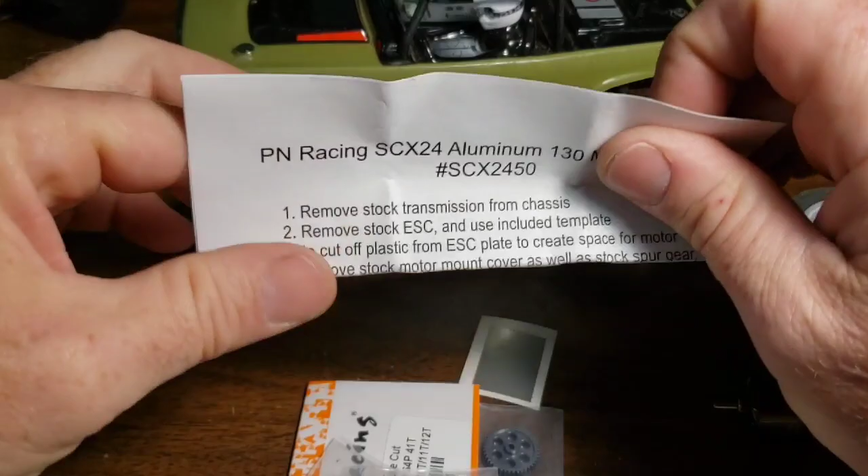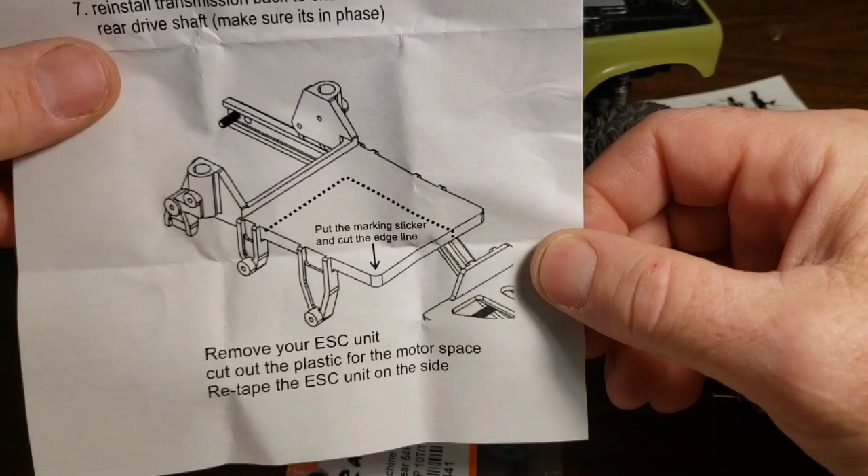It even comes with how-to instructions, how about that? And it tells you to remove quite a bit here. So I am going to have to go with the stock ESC mount, and I guess the Hot Racing one's going to go back into storage for a while.

I'll start by showing you the stock photo of how it's supposed to mount, and then we'll proceed forward from there.

I was looking ahead in the instructions a little bit and noticed a few things. First of all, I'm going to have to reflip my skid plate around, because in order to use this Thingiverse or Shapeways motor mount part, you have to flip the motor plate or skid plate around. So I'm going to have to reflip that back to the stock position, because the transmission needs to be on the back side again.

There's no instructions for flipping the skid plate like you have to do with 3D printed parts. So what I'm going to do is go ahead and install the motor mount, install the motor on the mount with a new PN70 motor, throw the gears in it, and we'll be able to compare the motor heights at the output shaft from the bottom.

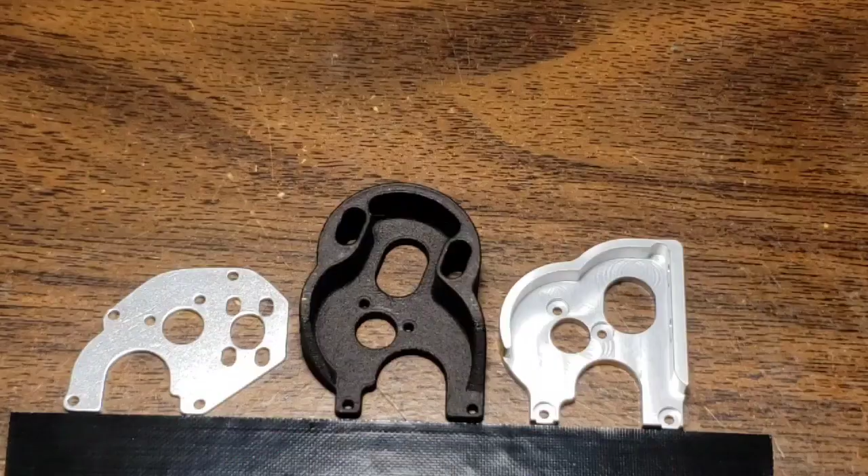Here's a comparison of all three of these motor plate mounts. This one is equivalent to stock, but it has the extra holes drilled for the Barrage motor, so you can mount either stock or Barrage. This is similar to the motor mount that I currently have in my Deadbolt, and this hole here is where the output shaft of the motor is for stock. This way up here, see how much higher it's going to carry the motor? This is the baseline bottom of the chassis where it sits, this black tape line that I've made.

As you can tell, this one's a whole stock motor higher, and this one is only about half a width higher.

Usually these come mounting in close to the bottom. If it's similar to this one, it mounts close to the bottom, and I'm assuming this one will too. So it's probably going to be about 4 or 5 millimeters lower, and that will matter on a truck this big. So I'm going to proceed forward and install the motor mount with a brand new PN70 motor. I'll use that other one I have back in a race car, because that was a fast motor, and it doesn't matter so much in a crawler since you're not competing with speed. It wouldn't be a bad thing to have a fresh motor installed as we go forward.

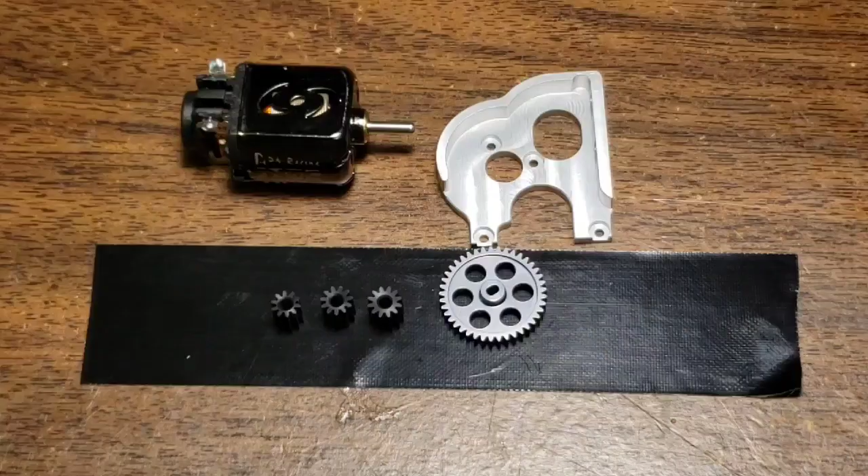We'll take a quick look at the gear choices with this PN70 kit. Stock is a 5-to-1 ratio, meaning the pinion gear has to turn 5 times to rotate the spur once. The hot racing gear system with the 0.5 modulus is a 4-to-1 ratio, roughly equivalent to this one right here, because this is a 10 tooth and this is a 41 tooth spur.

If you want to stick with what you had before, you can do that. If you were previously running one of these Shapeways mounts and you like that gear ratio, it's pretty high, and this motor spins very quickly but has a lot of torque, so it works out well. But this is what we're used to with this motor and this plate here. So if you've seen my truck run, if I wanted to keep the gearing the same, I'd leave it with this. If I wanted the truck to be faster, I'd put this one on, and this would be even faster.

This is a 4.1 to 1 gear ratio, this is roughly 3.72, and this one is 3.42. For every time this goes around once, this has to go around 3.72 times. With this gear, for every time this goes around once, this one has to turn only 3.42 times. So the ratios are 4.1, 3.72, and 3.42, meaning it's going to be quite a bit faster. In fact, it's probably around 15 to 20% faster if you were to use this gear here.

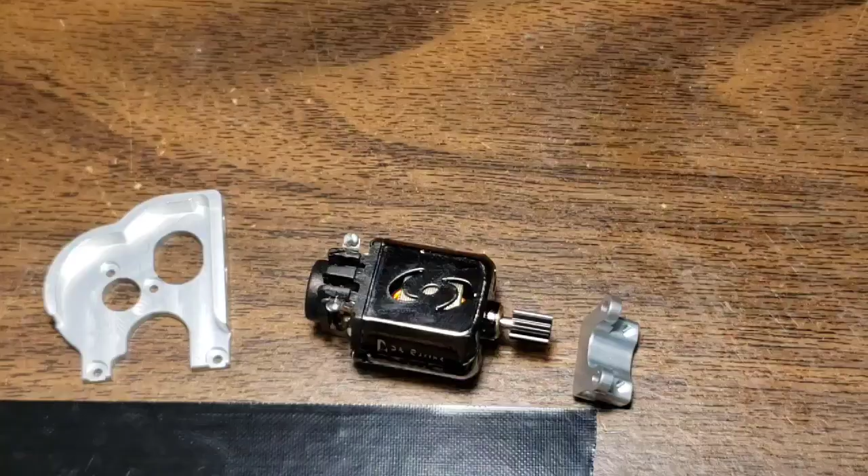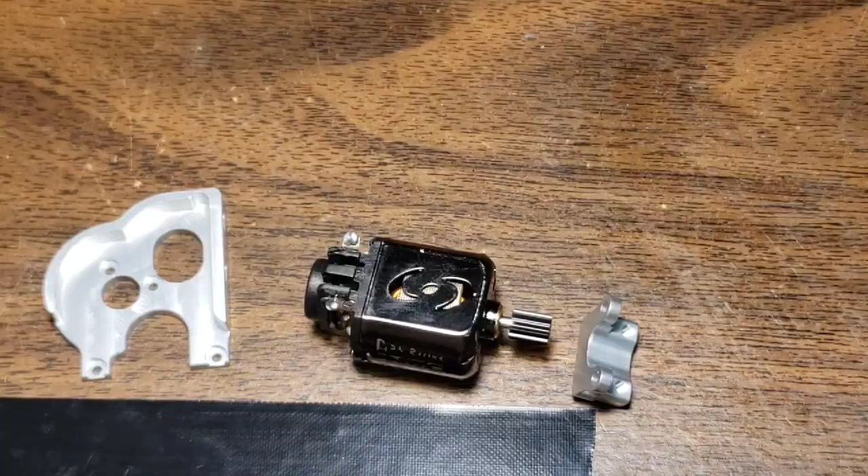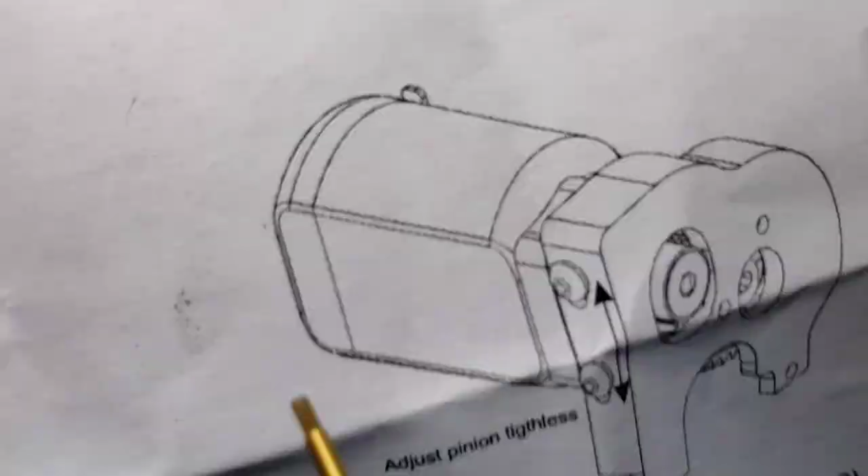I've pre-installed the pinion gear onto this motor, and according to the diagram, this is going to be important later. It shows the wiring tabs, where the wires hook up, on the opposite side of where you're going to have the motor hook up. So these need to be on opposite sides, because later it shows it here for the adjustment. This plate actually bolts onto this, and it does not show the tabs on this side, so we need to make sure it goes on like this. They've included the screws with that.

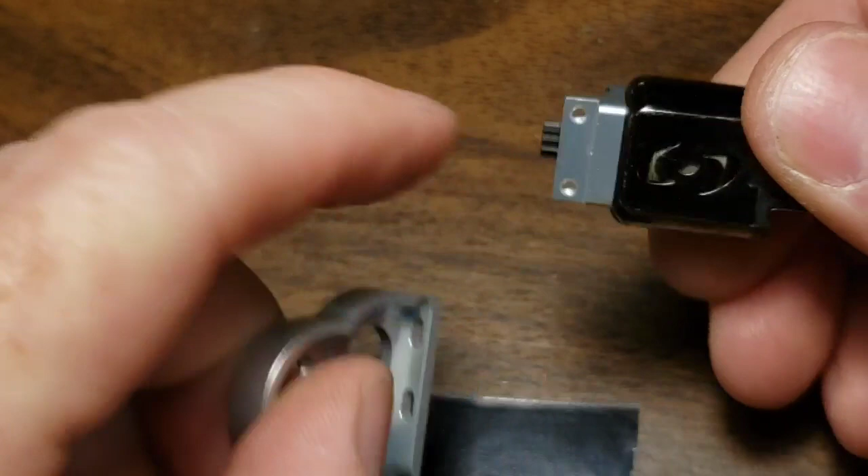I'm going to use just a tiny touch of Loctite glue to keep it in place. When you install these screws, do not over tighten them, or they'll strip out. That's what it looks like installed. Alright, here's the next step in the build. Pretty simple — this has a slot right here that goes right here, and this is your adjustment for gear mesh.

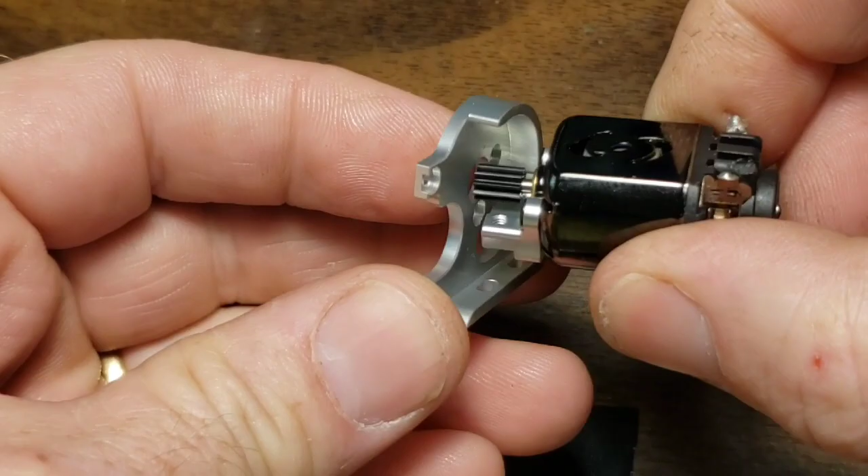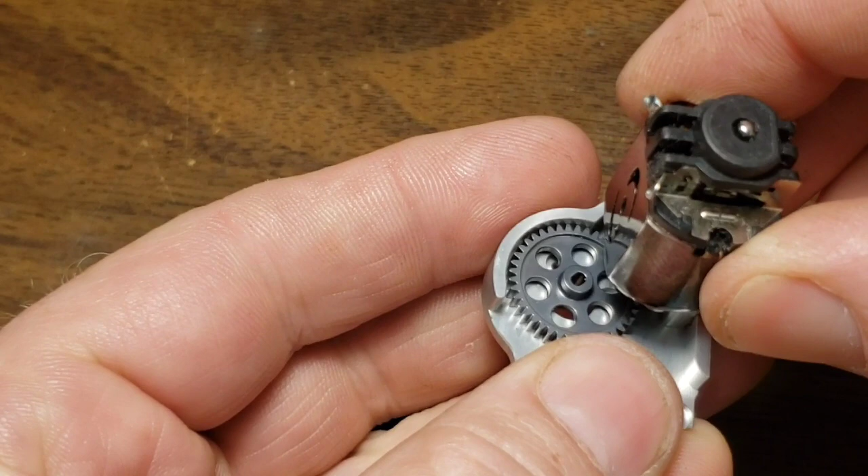The spur gear is going to sit in this area right here, and this will fit right in like that, and that's going to be an open gear system. You're going to adjust your gear mesh by sliding it like this. So I'm going to put the screws in here. I'm not going to Loctite these, but the transmission will be on the other side of that. This is how it goes together.

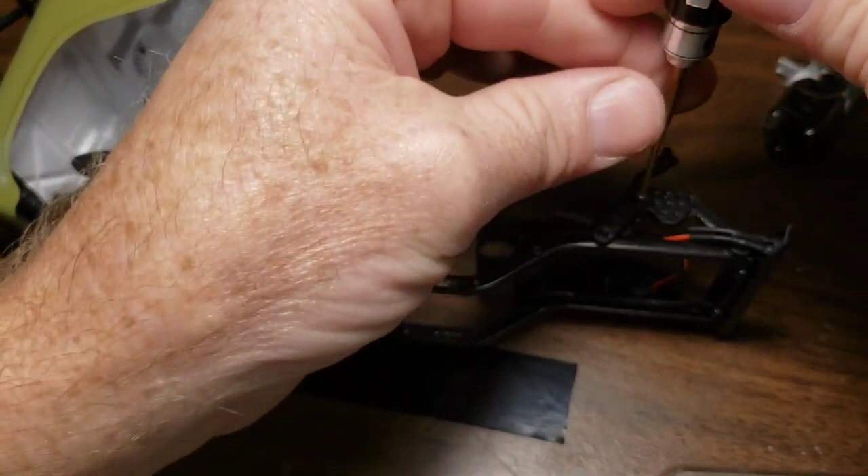Alright, the next thing we're going to do is prepare the ESC tray for the new motor. There's not enough room for the motor and the ESC tray, but there is if you get rid of part of it. Normally the ESC trays don't have these holes in them, but I cut them just to lighten it, because I want my rigs to do the most extreme things possible, and every gram counts—that's probably 3 or 4 grams off the top of the vehicle. Overall, I think this is going to be equal or less than current, because I have a metal ESC tray, which probably isn't good.

That's up high, and that's heavier than necessary, so that will be corrected today. I don't think it's going to hurt anything that I had these holes pre-drilled in there, because you're going to end up cutting most of this away anyway, and it's going to lose this mounting point right here. You'll still have these 3, but 1 on this side and 2 on this side. It doesn't have to hold that much weight, it just has to sit there—the structural part is the front here, and this is where the shock hooks up, and this is where the body mount goes. So it should still have plenty of rigidity, even with what I've done to it on 3 posts.

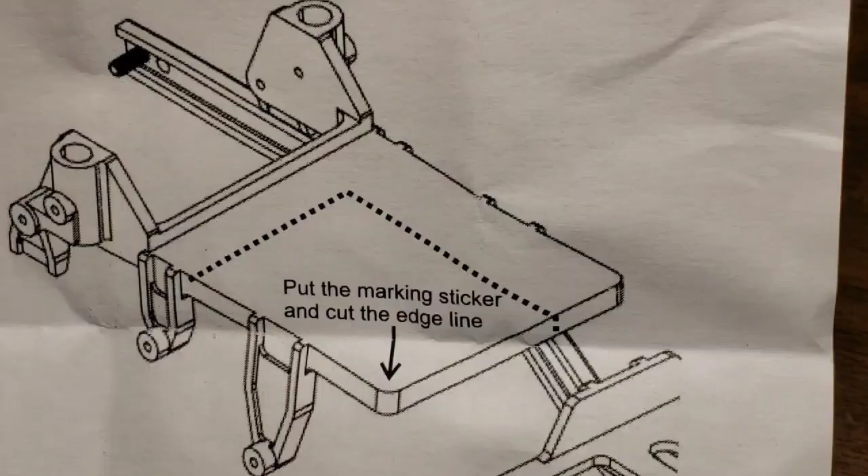The instructions say put the marking sticker and cut the edge line. So I'm going to put the marking sticker the way they've written it, with the arrow that's right there, into the corner of the ESC tray. Where that is marked is pretty close to what the picture shows, but that's going to really cut it close on this side here, so I think I'm going to cut it out a little bit farther. Then if I need to clearance it with the Dremel tool later, I can do that, but I'm going to leave a little bit of meat on that, just because I think only about 1.5 millimeters is not enough to maintain structural support.

If I need to, I can always tie these two together with something, or glue something in there. But I'm going to make a line right through here and just keep a little bit more meat on that. I'll go ahead and cut this. I've got no problem cutting this out or losing this piece here.

I'll spend a few minutes here reflipping my skid plate back to its stock position. I'll remove this metal Hot Racing mount in favor of this lightweight plastic one that I've cut, and I'm just going to be able to stick this right back on just as it was. In theory, that should be just fine. I've got no problem with that.

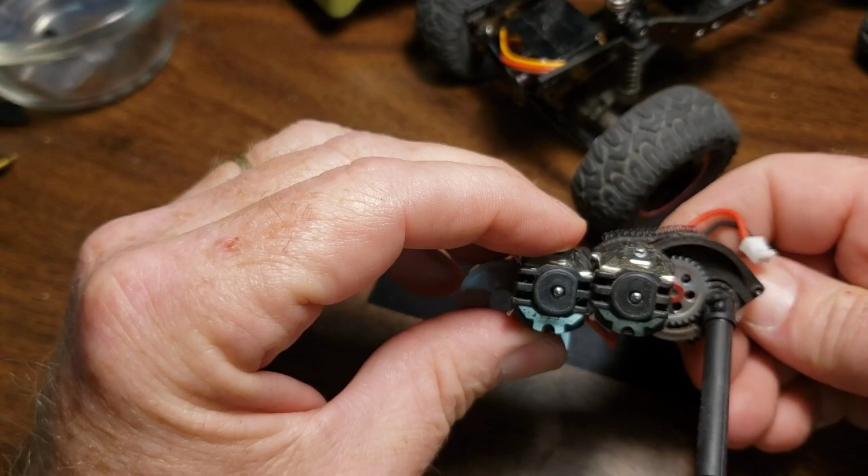I'll try to line them up where the screw holes are going to be, and you can see that the PN mount is going to mount significantly lower than the Shapeways. The center of gravity is not affected by the orientation of the motor, whether it's sitting sideways or vertical, because the center of gravity for the motor happens at the shaft, not the outer edges. It's symmetrical, so the CG of the motor itself is at the center point.

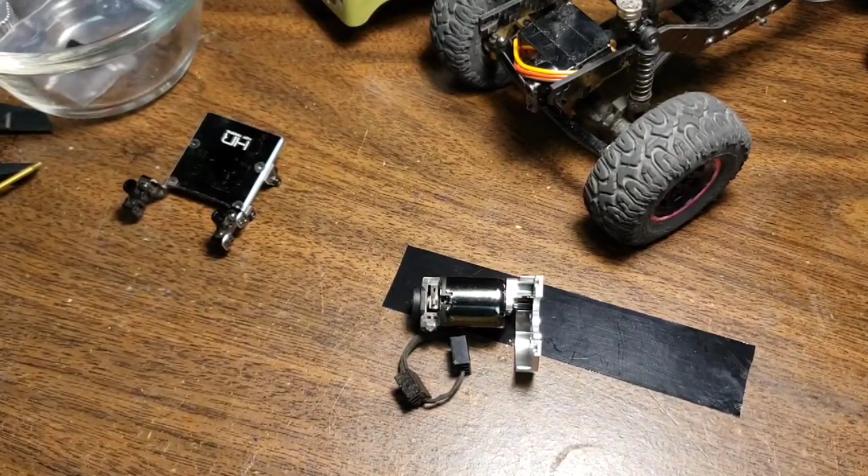And it looks to me like that's going to be about half a centimeter different, and when you're trying to climb, that's going to be a big deal. I think that by switching from this heavier motor mount... I should have weighed the other one before putting it in. I'll weigh this one right now, but this is pretty heavy, and I'm kind of surprised I ever installed that in the first place, given the fact that I try to keep all the weight down low on the bottom and not have any up top.

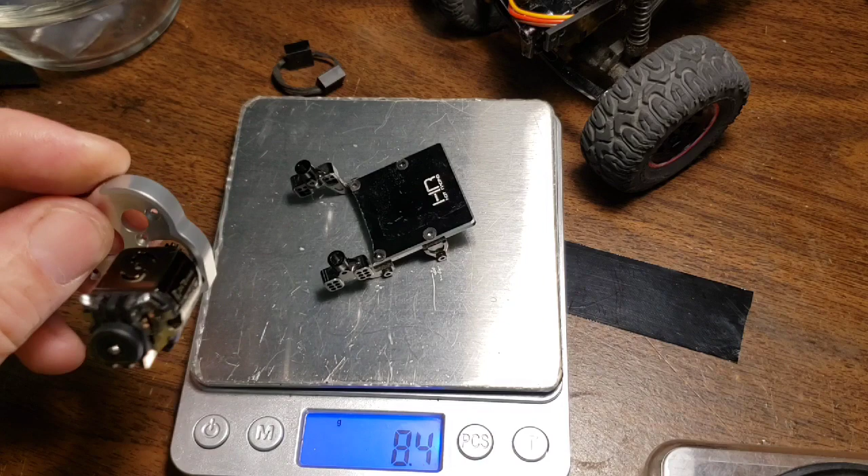That's an 8.4 gram piece, and I bet the one I put on is maybe 3. It was pretty chopped up, pretty small. So I'm gonna save 5 grams there, and I'm gonna lose some of that with this metal mount. But again, it's all low, and it's going to be holding this motor forward in the vehicle, so it's going to give the car an overall CG advantage. I think the difference in weight is going to be negligible, just because I'm getting rid of this heavy metal piece in favor of this lightweight aluminum one, even though it's, I'm sure, lighter.

I should have weighed that. I'm sorry for not weighing that. I should have weighed those pieces before I put them together.

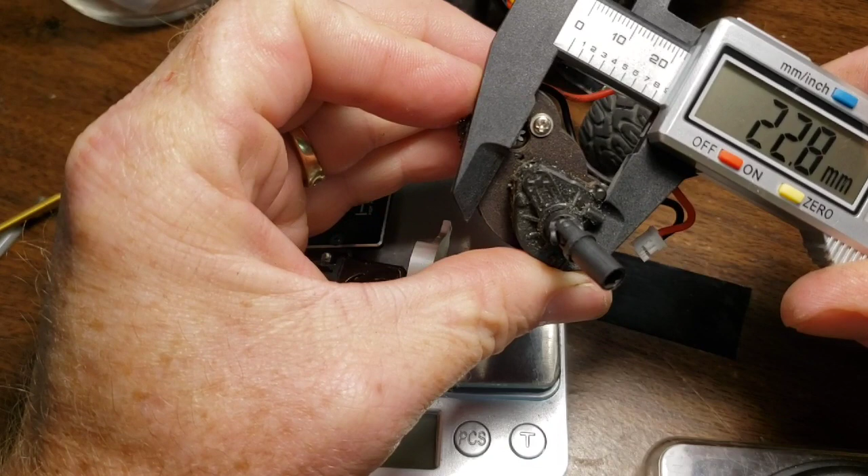I'm gonna pull this motor off. Actually, hold on a second. I'm gonna get a measurement from the bottom of this assembly here to where the center line of the shaft is currently, and that's right at 22.8. So when I reinstall the PN70 with the new mount, we'll call it 22.5.

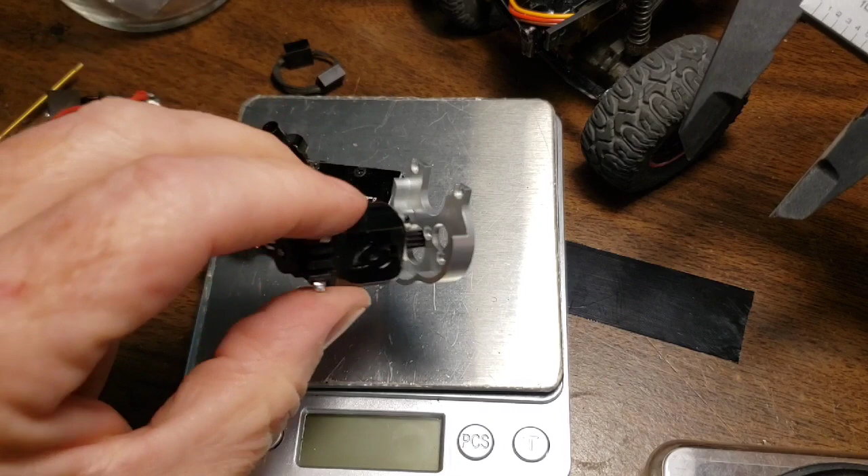When I reinstall this motor onto the transmission... I wish I had a second transmission unit, then I could just leave this one as it is, but I have to reuse the transmission. Anyway, call it 22.5, and once it's installed and the gear mesh is set, we'll be able to get an accurate reading of how much lower this motor is actually going to sit.

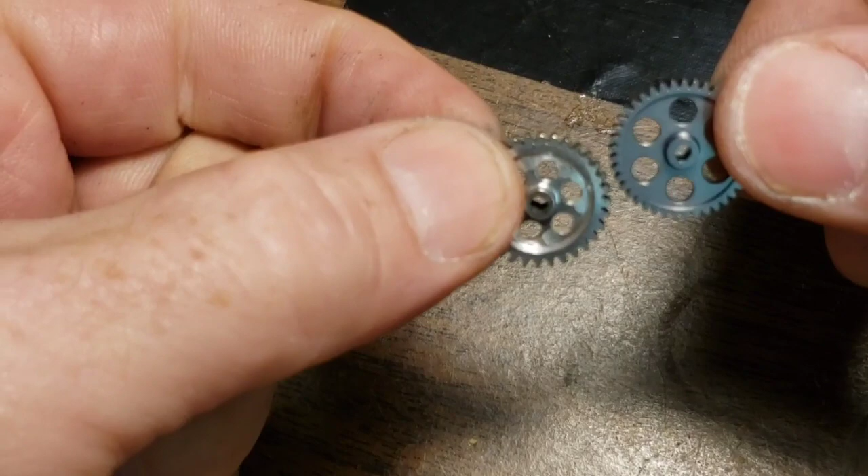Okay, I'm going to show you the hot racing gear and the PN70 gear from PN Racing. This is a 64 pitch. I don't know what the modulus is on that, but this is a 0.3 mod gear, and they do not match. This is a much finer cut gear. It's going to run smoother and quieter, and may even last longer.

But this one shows really no wear coming out, while this one is a bit noisier than stock. I'm expecting good things from this, but they do not line up. So don't think you're going to be able to buy a PN set of gears unless you buy a 2mm output shaft motor and the PN spur gear, because they won't mesh. Hot Racing and PN don't play well together, they would never mesh. And these won't mesh either with your stock gears, because it's not a 0.3 mod gear either.

Well, there does, after all, appear to be a little bit of gear wear. Just this dust here, that's silver from the gear and the spur. I'll clean that up and show you what it looks like with the PN set mounted.

I'll try to add this earlier in the video maybe, but I'm gonna have to take these two screws out and remove this so that I can put the retainer screw for the pinion on, because right now with the motor sitting there I won't have the clearance to do it.

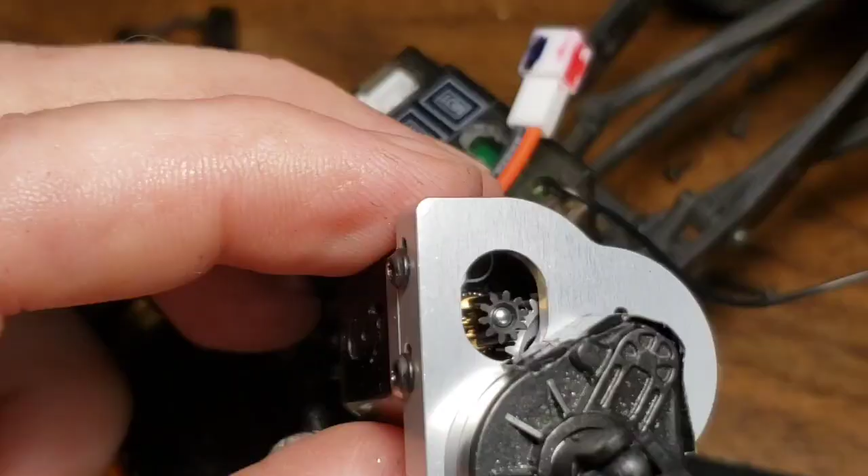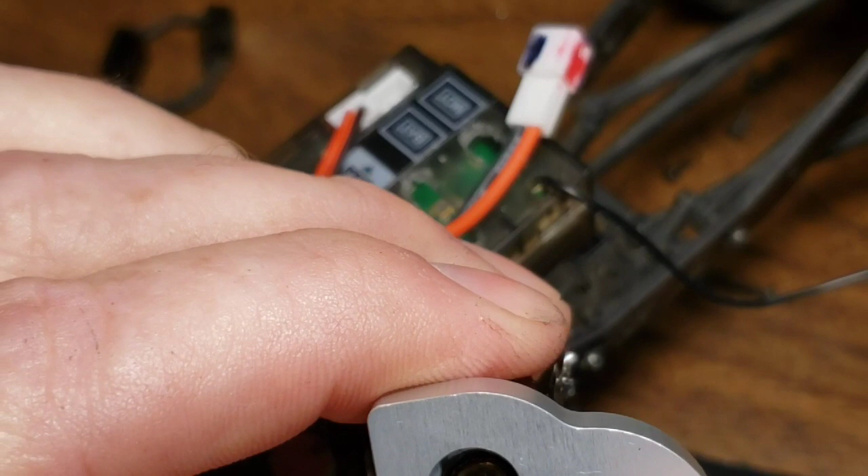This is a critical part. When you set the gear mesh, it has to be able to move a little bit but not be too loose that the gears don't line up. What I like to do is check the gear mesh at various parts along the gear to make sure it's not too tight or too loose. I want it to be able to move slightly no matter what part of the rotation the gear is in. Oops, there, it just popped out.

Make sure that it's catching on all the teeth. Looks like that could be slid on even a little farther.

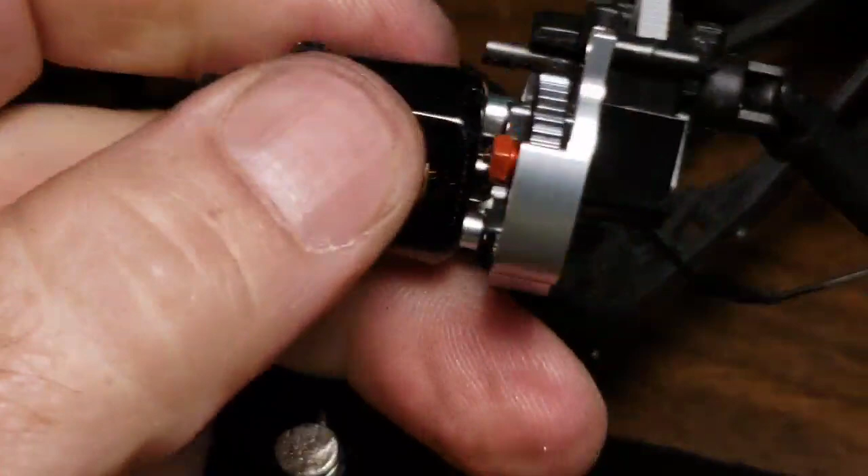I'll work on that gear mesh, but this is critical. What I'll do before I even hook it up to the truck is hook the wires up. I'll swap them over from the old motor, get the soldering iron out, move those over to the new motor, and check it to make sure it sounds right before proceeding.

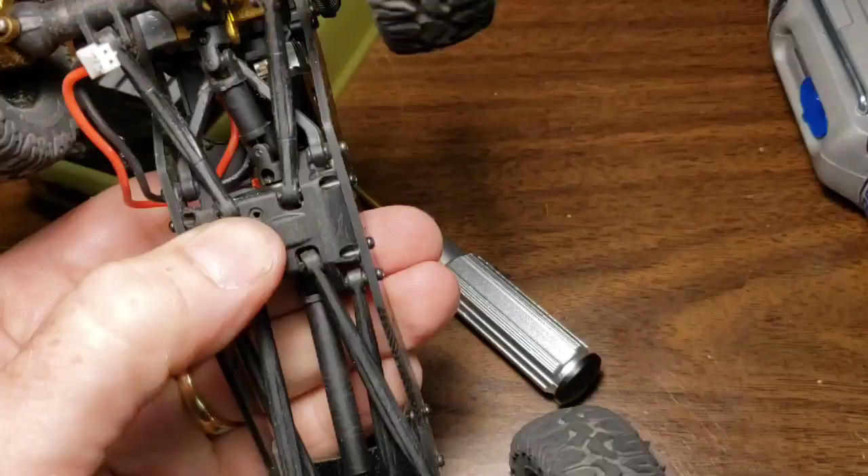Alright, I've hit a bit of a snag here. I'm trying to put the front end together. I've got the thing all mounted in, mocked up, and set in place.

The rear axle's fine, I had to re-flip it because I had flipped it previously. This center plate, I'd flipped this previously to accommodate the other PN70 mount that I had, and in the process of flipping it back, this plate's a bit thicker than the stock one, and I'm running into an issue where this cannot collapse enough, that slip joint, to be able to compress the suspension.

And that's a bit of a problem. Make sure everything's out of the way. Yeah, it's pushing on the drive shaft, so I'm going to have to shorten that just a little bit and provide just a tiny bit of clearance, maybe a millimeter or two, in order to get this suspension to compress all the way.

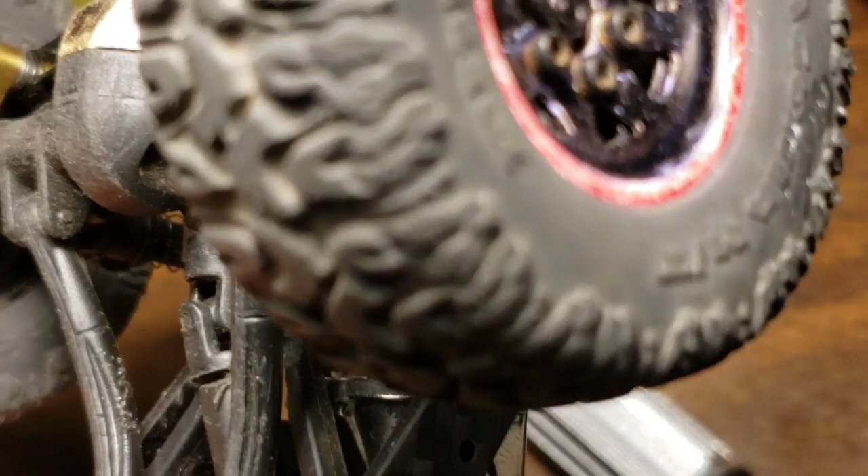And I've just discovered a pretty critical error. The upper control arm hits the PN70 body right there. That's a big problem because there's no way around that.

They didn't mention that at all, and that's a huge issue because you can't get full suspension compression without bending the control arm, the upper control arm.

I can notch it a little bit right there, and that'll give me about 3 millimeters, but I can't notch it too much or this is going to be ruined.

This control arm right here, that's hitting the motor. I thought it was the drive shaft because it was initially, but once I clearanced the drive shaft to give it a little bit of a gap there, it's the arm, the upper control arm, that's hitting it.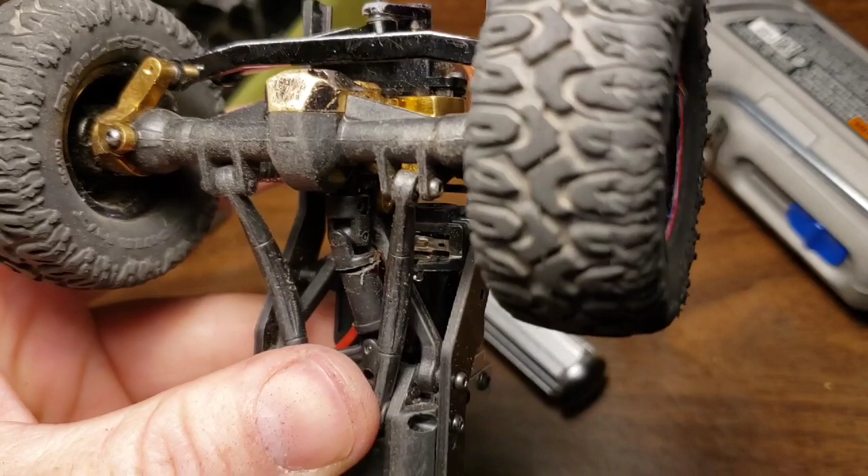PN should have said something about that when they built this, because they're selling them, and that's a problem. I can't see it being much better with the C10 because it's going to go out even farther forward and possibly be even more of a clearance issue.

But I'm going to see what I can do. I'm going to basically take this control arm out and thin it so it's only half as thick. I'm going to take the top down, and hopefully that'll give me the clearance I need.

That's a big problem. So if you couldn't tell from the previous picture, when this suspension compresses, you see that wishbone here? This part of the wishbone is hitting the motor and stopping. It will not compress the front end. You will not get full articulation.

And I've got to figure out a way to deal with that. PN built a really, really nice motor mount, but they failed to consider the fact that the motor is so large that it's actually even going to come in contact with the drive shaft.

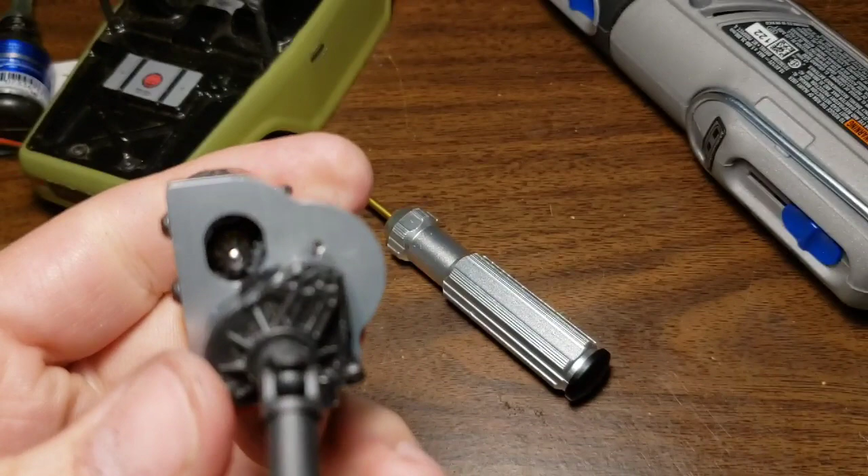The other way around this, to give me a little bit more clearance, is to use one of the bigger spur gears, because then the motor will naturally sit higher, since it's going to have to be up higher for the clearance. That is really a disappointing finding.